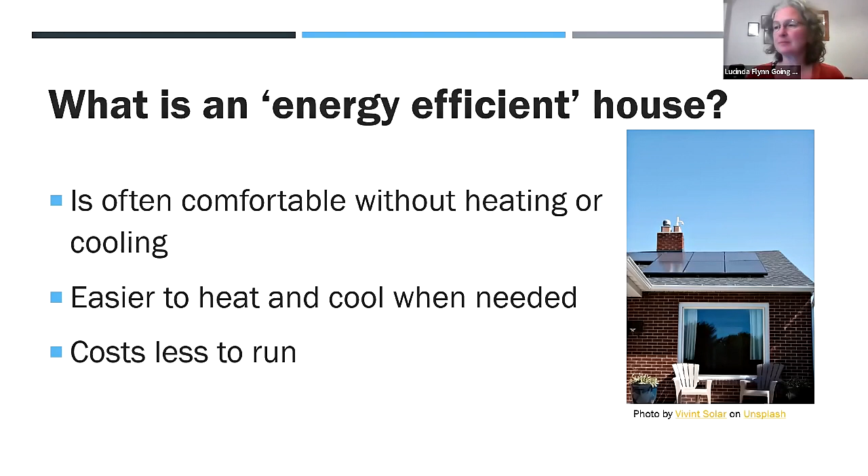What is an energy efficient house? It is one that's pretty comfortable. So at this time of year, you probably won't be coming home and putting on a heater, because it's hopefully going to be keeping you fairly comfortable as is. If you do need to put one on, it doesn't cost you too much, and it maintains its temperature as well. So getting an energy efficiency assessment isn't about me saying, oh, you can't do this, you've got to do this. It's about working out how to make your home work for you as well as it possibly can. And there's lots of reasons why you might want to do that.

The three biggest ones are cost savings, which is very significant. The average home in Victoria costs around $1,800 a year just to run the main fixed appliances. So that's heating, cooling, lighting, hot water, and pools if they have one. And that's just a 3-star rating. If you go below that, it's higher. I think a 1-star rated house is more than $5,000 a year. So as you get a higher rating, your costs go down dramatically. And that's, of course, a massive motivation for a lot of people.

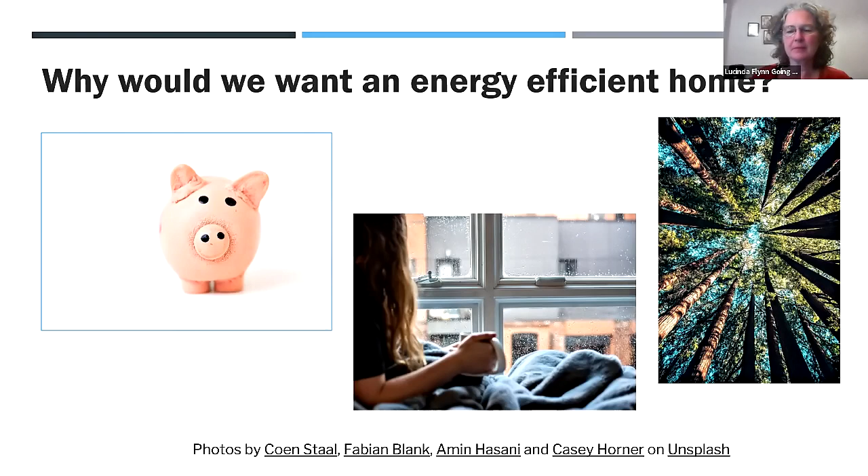Of course, comfort is a huge one. Sometimes people have no issues at all with their bills, but their houses just aren't very comfortable. So that's a really important one. I had an example of a house that I went to and did a scorecard on, and they then did a whole lot of upgrades and got me to come back to do another one to see what the difference was. And he said, we used to have just plug-in electric heaters, and it would cost us $300 a month to run them, and we were still always freezing. And now we've got 2 efficient reverse cycle air conditioners, and it's $120 a month, and we're always warm. So he'd done a combination of appliance upgrades, but also building shell upgrades.

Victorian homes are quite famous, actually, for being inefficient the way they're built. Not just Victorian, probably Australian homes. Sometimes I'll do assessments for people from Europe, and they're a bit stunned by suddenly living in these houses that leak like a sieve, and that you have no other option except to turn the heater on if you get cold.

There are a few reasons for it. One, I think, is just that we are in a fairly mild climate comparatively, and so we've been able to get away with having pretty poor building codes. Even the building codes we have don't seem to be very well policed, so that you might have a plan that says you're going to do certain things, but nobody really comes to check that you have.

There have also been traditionally very cheap fuel sources in Australia, which people have made use of and just fallen back on using devices to change their temperature rather than improve the efficiency of their home. And so all of that has resulted in a society where people have a very low understanding of energy efficiency and how it works. It's not so much that they don't want to do anything about it, they just have no idea how to.

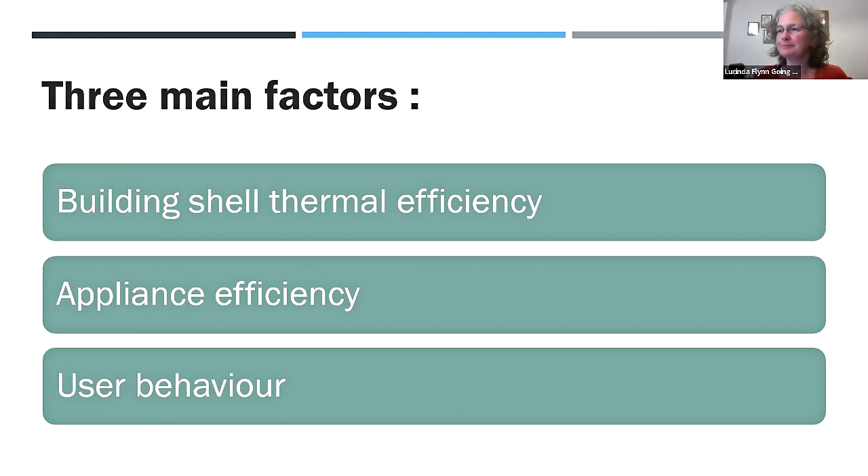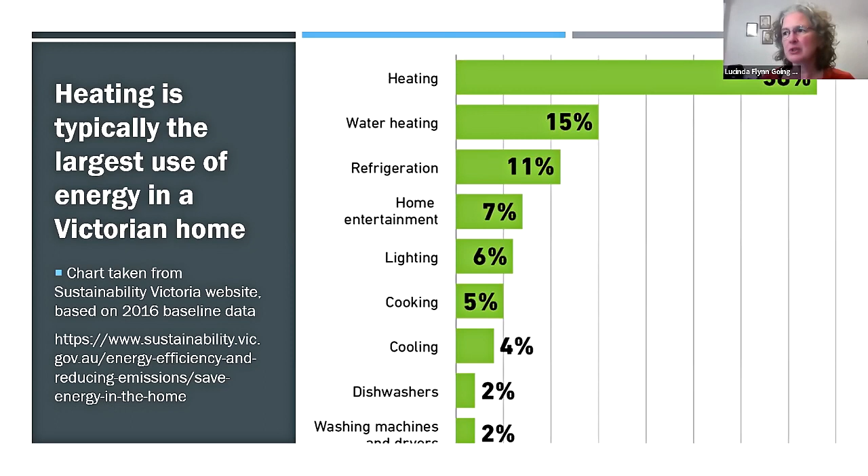So we'll start with building shell thermal efficiency. And this is, as I said, the shell that separates you from the outside environment. The areas that we look at are zoning, drafts, ceiling insulation, window improvements, wall insulation, and underfloor insulation. And generally, I will look at them in that order. And if they're all poor, then I would upgrade them in that order because they're going to give you the most benefit for what you do.

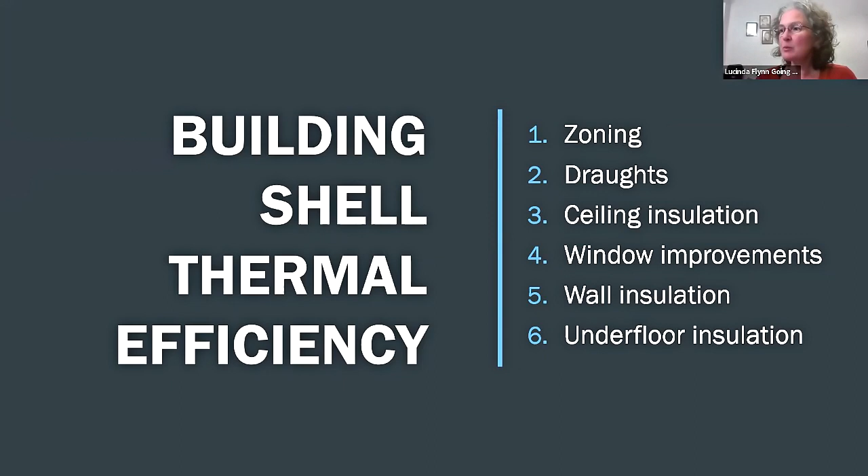But every house, of course, is completely unique, and some will have amazing ceiling insulation and everything else might be poor. So then ceiling insulation gets shunted down to the bottom of the to-do list. That's, I suppose, where an energy efficiency assessor can come in, because they can have that real holistic overview of how all those bits play with each other and fit in together. So we'll talk through these one by one.

Zoning is the first one, and it can actually be an incredibly simple and incredibly effective way to both reduce your energy use and improve your comfort. Zoning as a concept is just about creating smaller areas in your home that you can heat and cool as you need, and also potentially zoning out problematic areas. Say, if you've got a room that is right at the northwest corner, and it's always hot in summer, you could potentially just zone it out to reduce all of that heat coming into the rest of the house. And another common place to zone out would be a drafty bathroom or laundry.

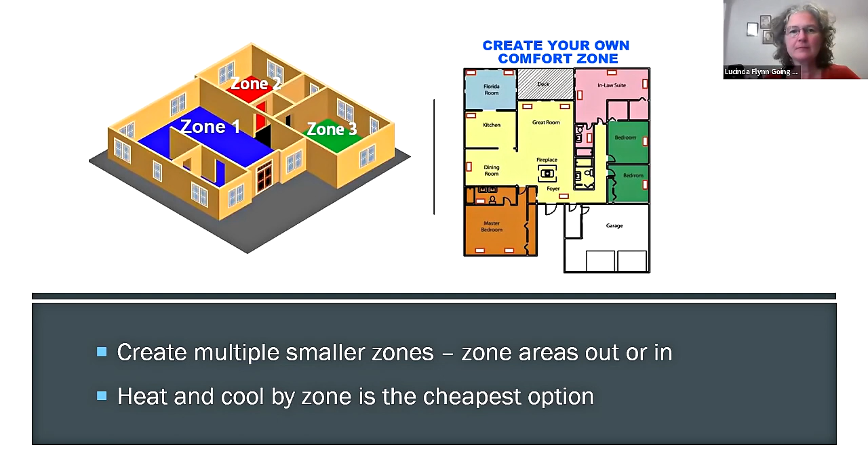Heating and cooling by zone is always cheaper. And so any system that you have, if it can be zoned or if you add individual systems per zone, that's always going to be a lot more efficient. And because the system is only heating a smaller area, it's more efficient at it as well. Adding additional zoning can be challenging depending on the design of the house, and especially the really new open plan houses can be extremely hard. They're not set up for it at all. But older houses are already fairly well zoned.

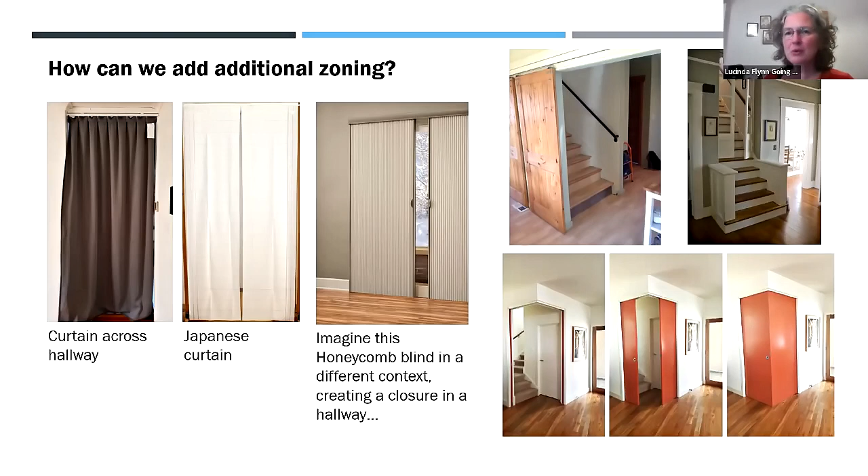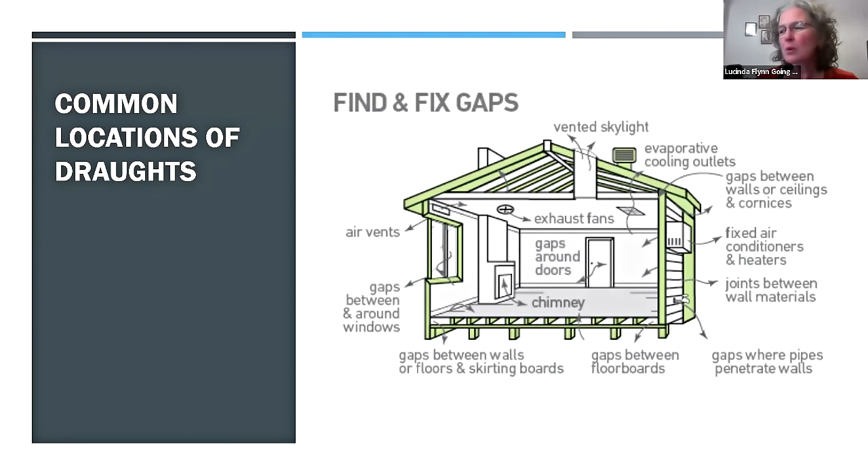Draft proofing is a massive area, and sometimes I think if people just looked at zoning and draft proofing in their homes, I'm convinced that they would often feel the difference straight off. I know in our house we certainly would have. We're in a 70s house which had heaps and heaps of drafts, and just draft sealing is enough to change our comfort levels. So this picture shows all of the kinds of drafts that are commonly found in a house, and we'll be talking through them, not all of them, but the most important ones.

Most of the time when people have open fireplaces, I'm not talking about wood combustion heaters like the sealed ones, I'm talking about an open fireplace. Often when people have them, they'll say, oh yeah, we use it once or twice a year just for a bit of ambience. And the rest of the time, it's just this open hole sucking conditioned air out of the house. So those are the ones that are really important to seal, which you can do. Actually, I'll talk about that in the next slide.

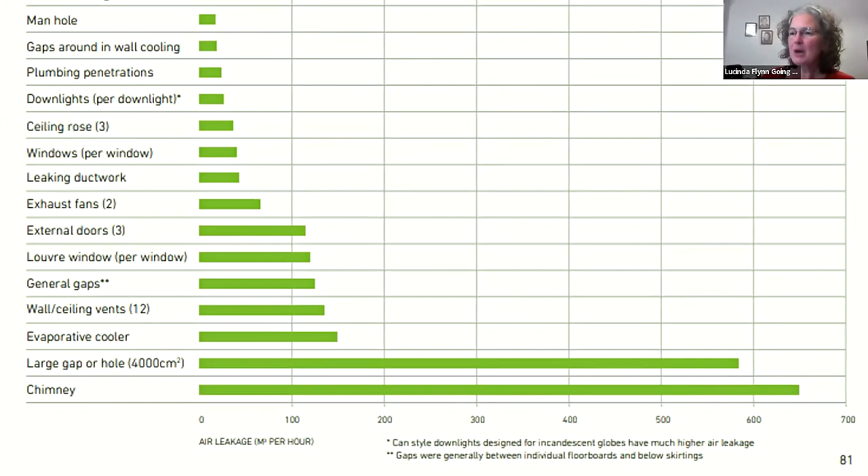The large gap or hole that's the next biggest impact would be from something like an open louver window in a bathroom, the louver windows that don't close at all, they're just permanently open. And then evaporative cooler covers are the next biggest one, which is very surprising for a lot of people because they're extremely common. I'd say probably half the houses that I go to have evaporative cooling, and people generally aren't aware what a drafty system they are. I won't go through the rest, but we will talk about some of them now.

We'll begin with the open chimneys. So to seal them, there are specifically made products that can be put into them. And the top right-hand side 2 pictures are of what's called a Chimney Sheep, which is a piece of felt that's cut to size to fit a chimney and has a pole on it, and you put it up your chimney and it's got a little tag hanging down saying this chimney has been blocked. That's an important factor because you don't want somebody coming to stay for a few days and try and light a fire and smoke out the house.

The bottom right-hand side shows an image of another chimney seal product from a company called EcoMaster. They're a Melbourne-based company, and they have a range of really good draft proofing products of all types. And I highly recommend for all of this draft proofing stuff that you have a look at their website. One of the things that makes them so good is that they have little DIY videos for every single product that shows you step by step how to go about putting them in. So even if you're just researching and you're thinking you might make something yourself instead of buying it, that's fine.

But you can get some really good information there about how they work and how to install things. Another thing that people do with open chimneys, professional draft proofers that I know will just cut a piece of high density polyester insulation and stuff that up there as well. So I've even heard people saying they've stuck cushions up there. So as long as you make a sign that tells you that it's been sealed, that's it.

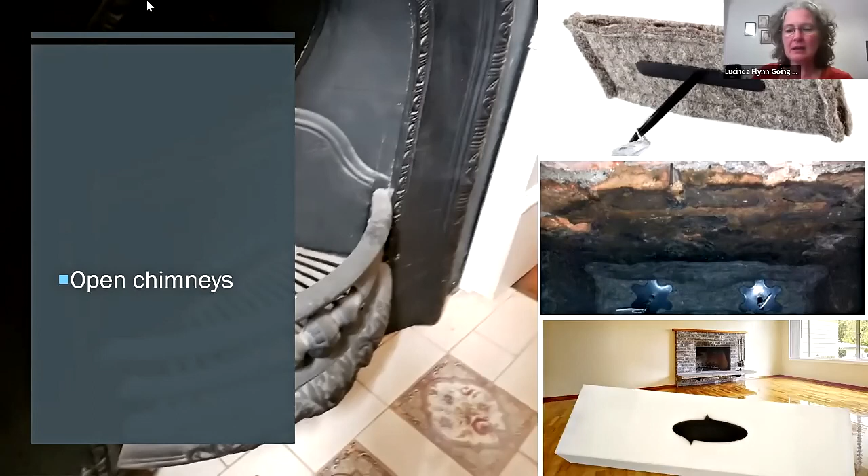Okay, moving on from chimneys. Things that you can seal with weather strips. Actually, there are so many things that you can seal potentially with a weather strip that this is a good one for you to go to the EcoMaster website and do a bit of research on. The typical things that you would seal with weather strips are external doors, windows, and sometimes internal doors.

Most people have experienced the draft proofing strips from a hardware store, the rubber or foam. They're okay, and sometimes they work, but because of the propensity of wooden framed doors and windows to sort of warp and have different widths of gap, sometimes those seals aren't the best option because they either don't fill some of the gap big enough or they're too big for other bits of the gap. And so you end up having trouble closing a door or window. They do compress a bit over time. So there's no problem with giving it a try.

But if you find that it isn't working, EcoMaster has a really great product called EMV Seal, which is, have I got a photo of it? I don't think I do. It's basically a V-shaped piece of either plastic or laminated paper. I'm not sure what it is, but it also has a self-seal strip on one side. And when the door closes, it just can close to whatever gap width it needs to be. So it can handle a few different widths. It also comes in a roll. So that's a great one.

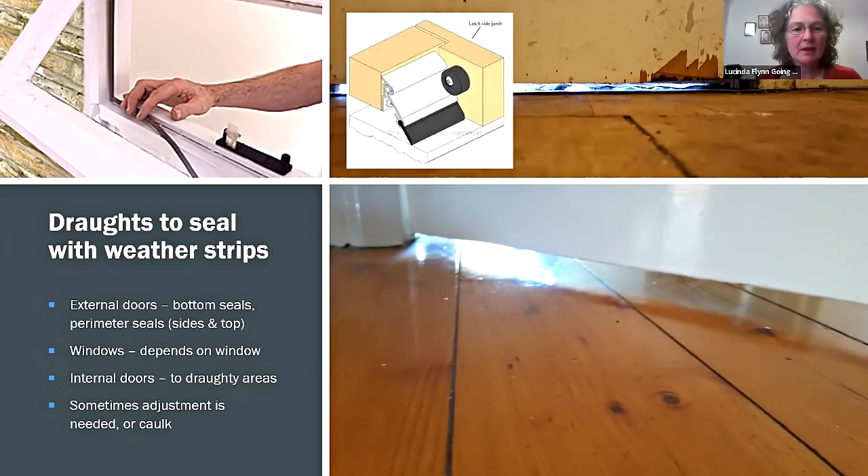Next on the list, oops, I've gone too far, is things that you can seal with a caulking gun. This is a really satisfying job to do, is to walk around an older house and find all the little gaps and cracks and fill them up. Things like wall vents, we don't require them. They predate the sort of 90s. I think it was 1990s that they stopped being installed in houses. And they are from when we used to have kerosene heaters and unflued gas heaters. These days we don't have those generally, and we can seal them. The only time I wouldn't is if you did have an indoor gas space heater.

Other drafts that you can see here, there is the bottom of a door frame, skirting gaps, architrave gaps, and also gaps that tradies have left when they've installed either plumbing or electrical items. Sometimes, if they're not very diligent, they'll leave them behind, in a new reverse cycle air conditioner. There'll be a bit of a hole there, or an oven or a dishwasher. So those things can all be checked as well and potentially filled up.

If it's a bigger gap than usual, you might need a bit of filler rod to stick in there first, which is a little piece of foam that fills in the gap so that when you put the caulking gun along, it actually has something to stick onto and doesn't fall out.

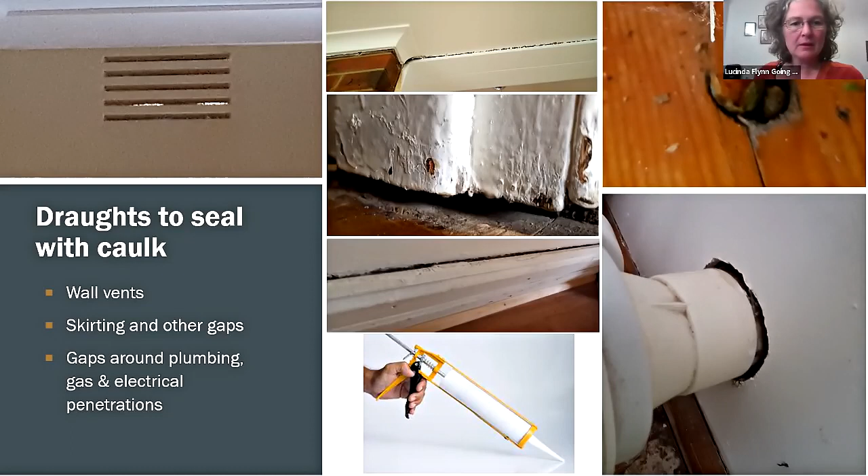Unsealed exhaust fans: the picture in the middle is the heat lamp that I mentioned, and they're not possible to seal, unfortunately. But any of the others, such as the picture on the bottom right, that's just a typical exhaust fan in a bathroom, laundry, or toilet. They are just a hole in the ceiling plaster, and it's straight air movement between that room and the ceiling space. You can't see that it is because it's got the mesh thing at the bottom of it, but if that falls off, you'll be able to see the roof basically, and often you can see light.

Luckily, there's a really simple fix, which is to put a Draft Stoppa over the top, and that's what you see in the top right corner. They're also available free under the Victorian Energy Upgrade Scheme. That's the same scheme that offers light bulb exchanges and home energy monitors. So do look that up and try and get your hands on some.

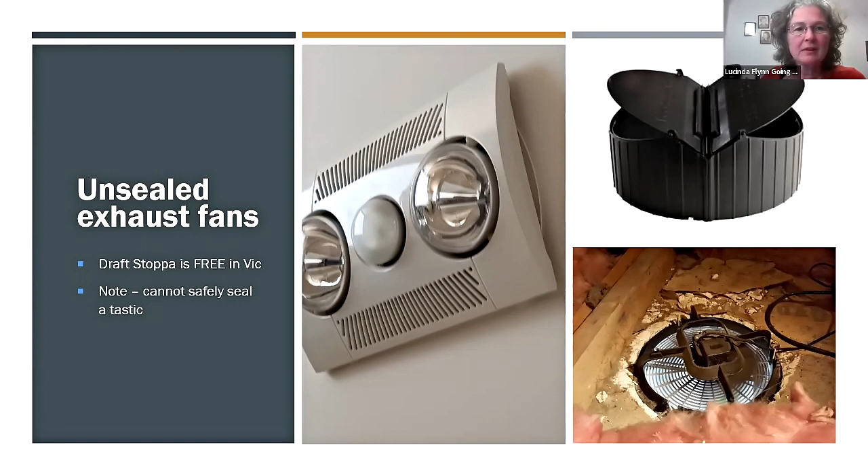Evaporative, open skylights. Those are often very drafty, as are the open louver windows and the other permanently vented windows. What you do with it depends on whether you have an exhaust fan in there or whether the window is openable. You can see with that window with a mesh bit in it, that window is obviously openable, so you don't need that hole there at all. You can seal it up. With the open louver window, I would also cover that up at a pinch. You could do it with bubble wrap, or you could get it replaced properly with an openable window.

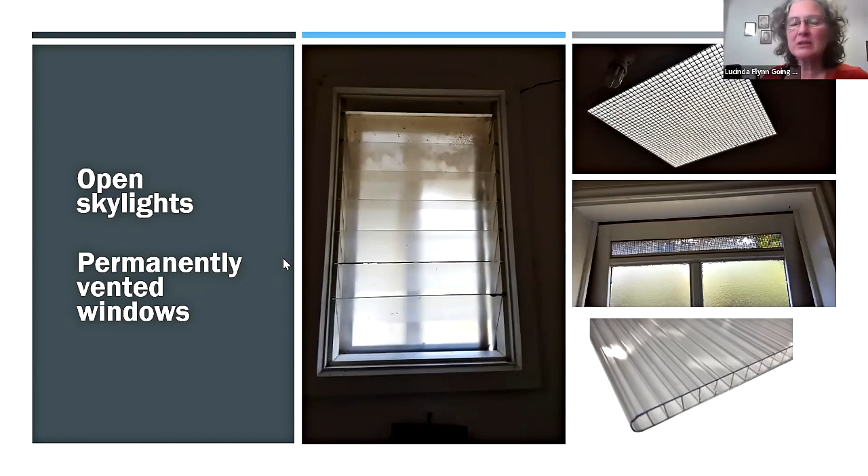And a skylight can be covered at ceiling level with that stuff that's shown in the bottom right-hand corner. It's called Suntuf, and it's just a sort of cellular plastic that you can cut to size and add into that gap. There are other longer-term things you can do as well, but we're just looking at sealing up drafts quickly and easily.

The reason they're so drafty is that, unlike ducted heating systems or reverse cycle air conditioners, those sort of ducted systems are sealed systems, they're enclosed, whereas evaporative cooler systems are completely open on the roof. So there's nothing to stop air going through that unit on the roof and through your ductwork, or vice versa.

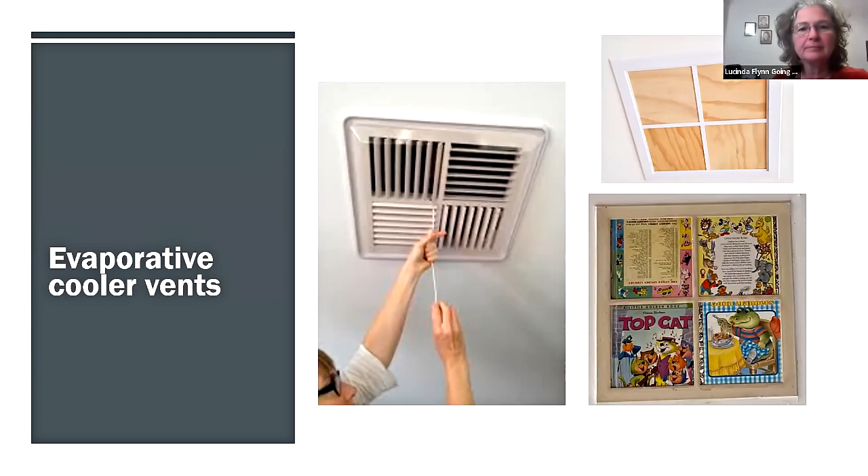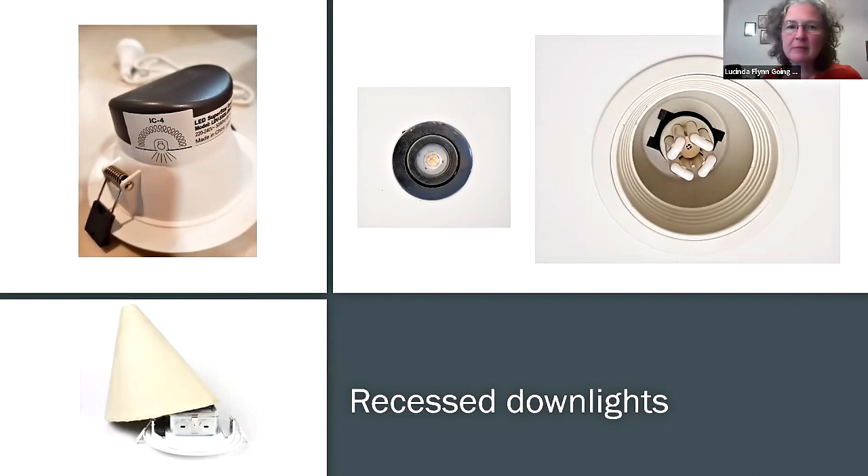So apart from swapping your downlights to the IC4 rated sealed LEDs, another option is that you can put a downlight cover on, which is the picture on the bottom left-hand side. They're easy to get, and if you're getting insulation done in the ceiling, the insulating company can install them for you over each downlight.

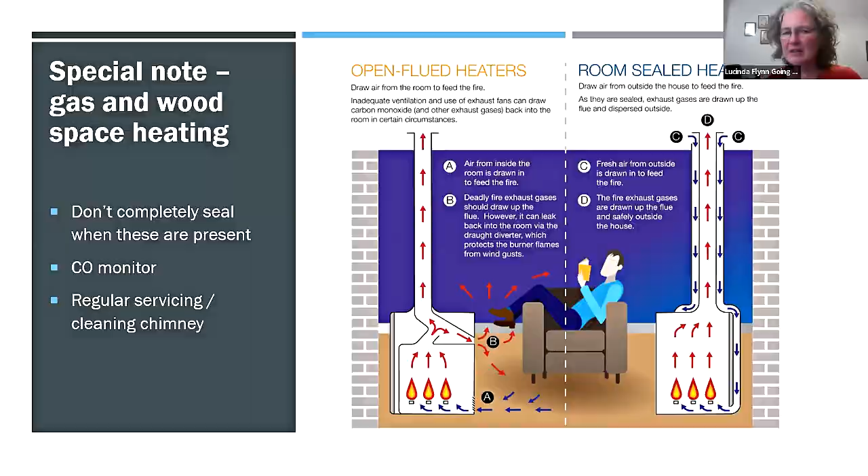A special note, this is really back to draft proofing and potentially hazardous appliances. When somebody has a gas space heater, we generally don't recommend they draft proof in that room. It's not that it will be a problem, but you just never know how well people maintain their appliances and how healthy the air is that's coming out of them. So that's why we don't recommend it. If anyone has something like that, or a wood burning fire, I'd put in a carbon monoxide monitor and just make sure you're checking them and getting them cleaned and serviced.

And that means if you've got a new build house that has R4 or R4.4 insulation, but tradies have come in after it's been built and the insulation installed and moved it all around to put in downlights or ductwork, and they haven't put it back, you might only have insulation that's functioning at half that value.

So people don't look in their ceilings, and I totally understand why, but it is something to be aware of. And if you have tradies coming over, just maybe get them to take a photo before they leave showing that they've replaced it where it should be.

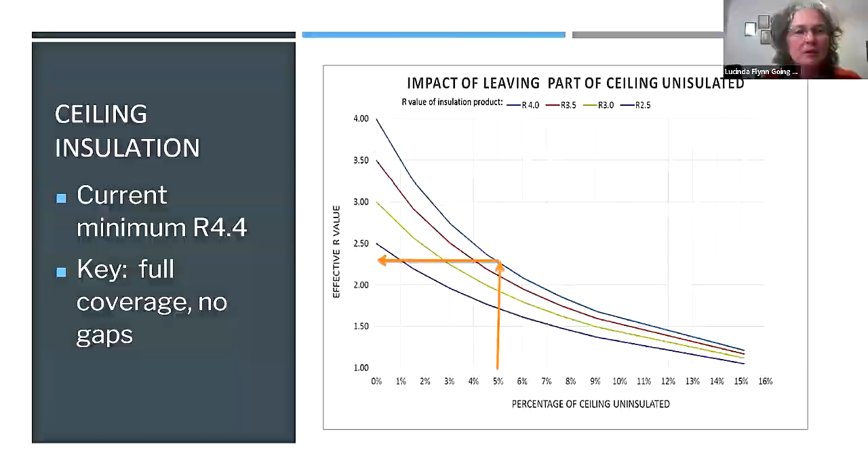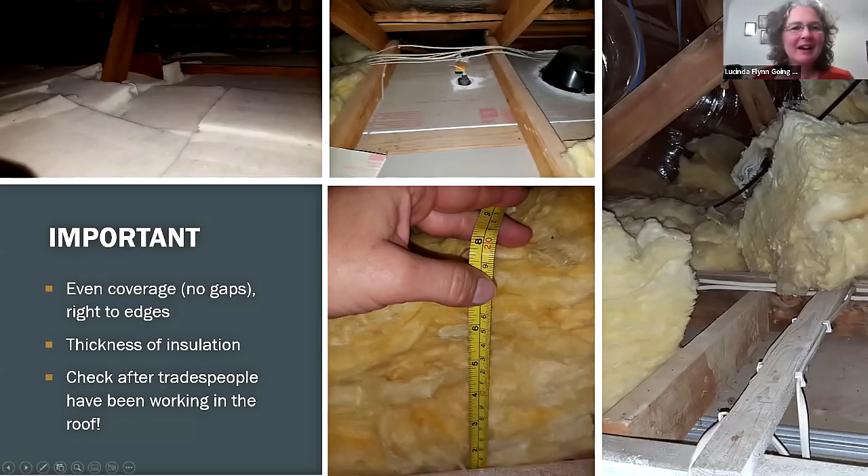All right. Can you do insulation yourself? Yes, you can, but if you've ever tried it before, it's a horrible job and there's lots of hazards. One is dust, simply inhaling it or getting it on your skin, or the fibre of the glass fibre. Electrical safety hazards are a really big one and extremely important to be careful of. I would always turn the mains power off if I was doing any sort of insulation work in the roof or under the floor. Potentially asbestos, depending on the age of your house, and falling either off a ladder or through the roof.

I have young adult children, and one of them did some labouring work and was told that pretty much every labourer that gets in a roof falls through it the first week, because they're just so unused to the fact that it actually doesn't hold their body weight at all. He managed not to though, so that's good.

There was one other thing that I mentioned that I must have taken the slide out for, which is the diminishing value of return of insulation. The biggest return you get is when you go from no insulation or very little, say R1, to R3, something like that. The current minimum is R4.4, but if you already had insulation that's R3 and it's well laid, no gaps, so we're not downgrading the R value, then you get a much smaller return on adding more.

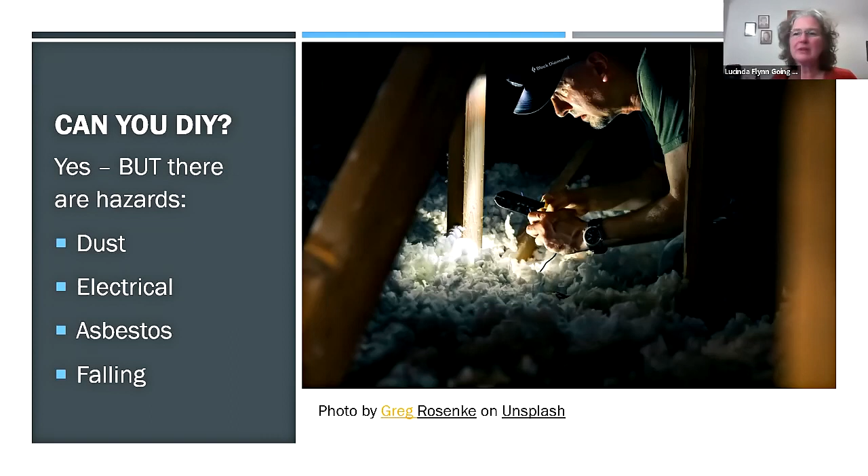So again, if I'm in a house and somebody has reasonable R2 or R3 insulation, that would fall to the bottom of my list because they've already made the biggest impact they can with their ceiling insulation.

Window improvements are one of my favourite topics because there are so many things you can do with windows. Double glazing is heavily marketed, and a lot of the time I go to a house and people say, we know that our windows need improving, but we just can't afford 40 grand to get them all replaced with double glazing. And luckily, I can tell them that there are many other ways to approach it.

So the different things that impact windows are the covering, so curtains or blinds, whatever you have, pelmets, glazing, frames, and external shading. We'll talk through each of them at a time.

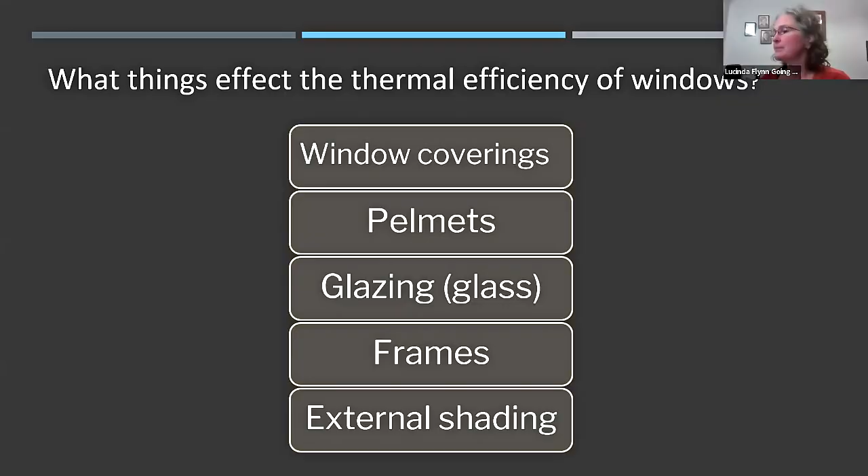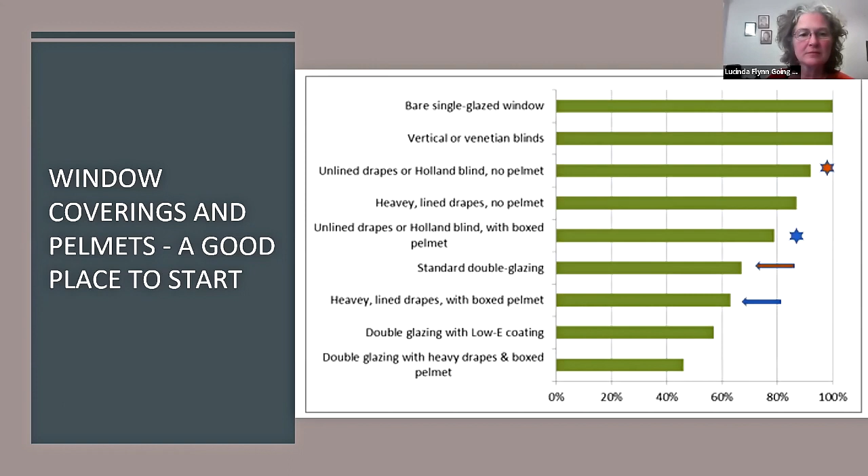Starting with window coverings, as I just said, it's a really good option. It's one of the cheaper options and you can have a massive impact. The key thing to understand about any sort of window covering is that its effectiveness is based on how well it reduces airflow across the glass, because air moving across the glass, either picking up heat or dropping off heat, is how the heat transfers. So the most thermally efficient window coverings are thermally efficient because they've stopped air moving across the glass of your windows.

An invisible pelmet is instead of the box pelmet that a lot of people don't like the look of. It just sits between the glass and the window covering, in the gap between, and stops air either heating up in the summer and moving into the room, or the warm air from inside touching the window and cooling down.

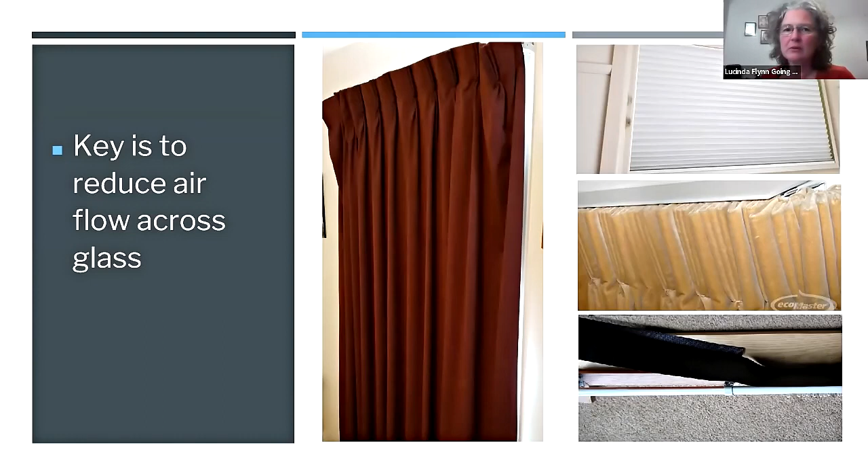Another good option for stopping airflow is the top right-hand side picture. If you have that sort of window style that has deep reveals, then honeycombs installed inside there can be a good option. They have cells that trap air, and as long as they're fitted very neatly, they really do create quite a good barrier to airflow.

Now, with glazing, it boils down to two options. One is double glazing and one is called secondary glazing.

Secondary glazing is where you retain your original window with the frame and glass and everything, and you are just bringing a second pane and adding it on. You can either do it professionally or DIY.

So with double glazing, you've got a few options. The marketed way is to rip out your windows with their frames and bring in new windows and frames that have double glazing. There is another couple of options. So one is that there's a lot of secondhand double glazed windows with frames on the market that have just been over ordered or were ordered the wrong size. And so you can get them sometimes pretty cheap. You just then need to either fit them yourself or get a handy person or a carpenter to do it.

Another option, if you have timber frames, is to keep the frames because they're great. The timber frames are the best, and just replace the glass. That can be a brilliant option for older houses that have timber framed windows, and costs a lot less, so about $275 per square metre for the glass cut to size, not including the installation. Whereas a brand new double glazed window glass and frame is going to be about $1,000 a square metre.

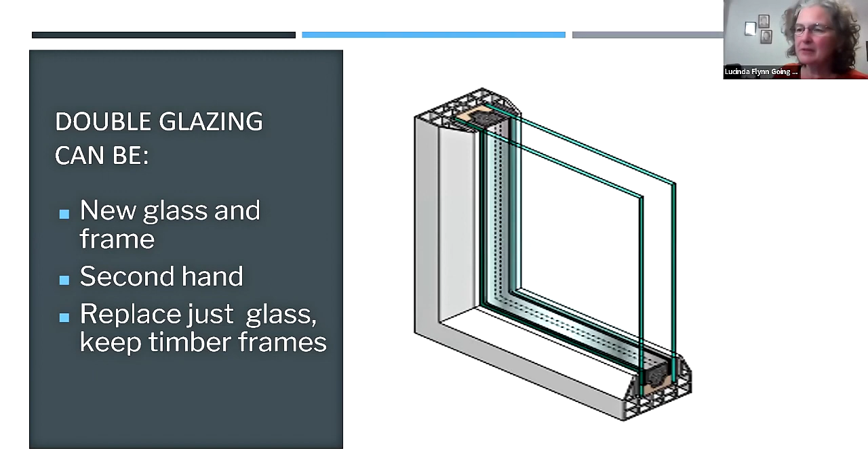Professional secondary glazing is done by a bunch of companies. Some of them will only work with timber framed windows. Some will work with any kind, including old style aluminium and steel framed windows. So check what each one does. It's about half the cost of removing the windows and putting in new frames with double glazing. So it's still expensive, about $450 a square metre, but you end up with an extremely professional look, and everything works. They make sure they don't leave without all the bits of the windows still working properly.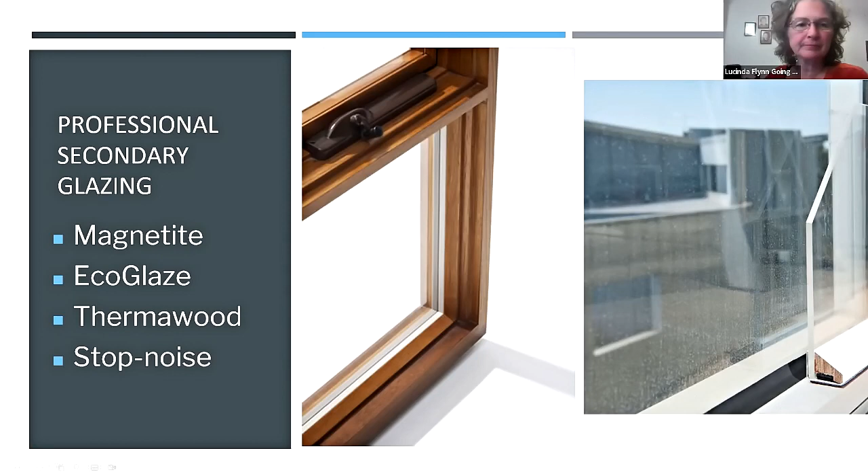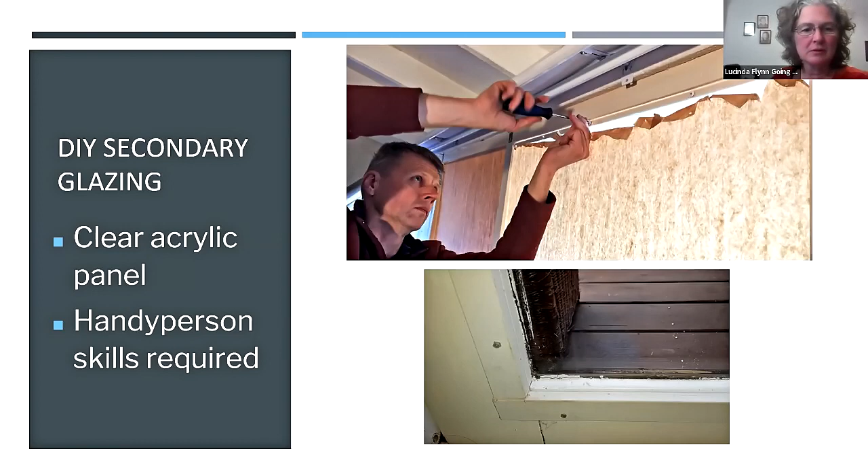Then you've got the really cheap DIY secondary glazing options, the cheapest of which would be using bubble wrap, which I think is becoming a little bit more popular. And it's not pretty, but imagine you're in a share house or in a rental that you can't do anything, or you're just really suffering from a freezing cold house. Bubble wrap is probably going to be a really nice option.

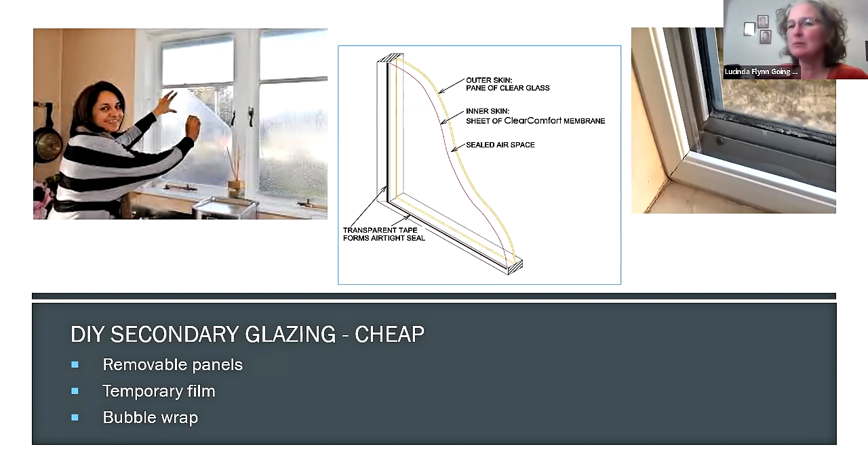And then the middle picture is an example of something called, the one brand is called Clear Comfort. If you want to look that up online, you can see the website and how it works. It's pretty much a clear, thin sheet of plastic. Around your window frame, you put some double-sided tape, stick the plastic on, and then use a hairdryer and shrink it. And again, it creates a still airspace, and it works really well. It's considered temporary because I guess it's very lightweight. If you had cats and they were clawing on it, it would break, but it does work really well in a lot of instances.

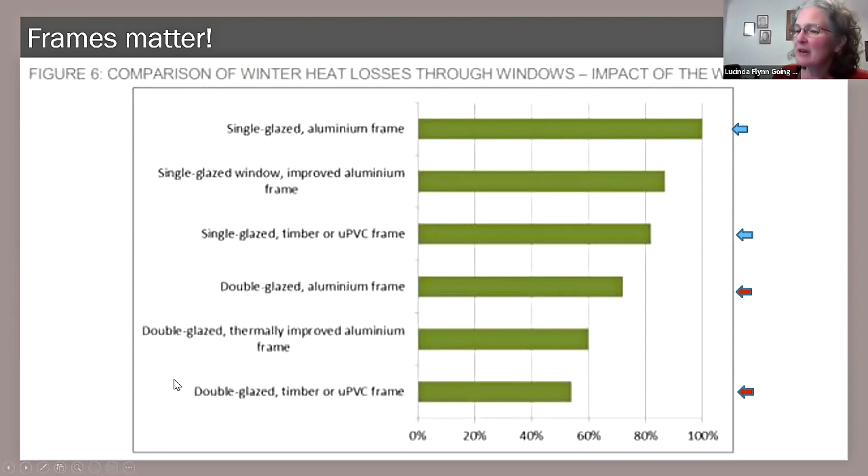Onto frames. Frames do make a really big difference to the thermal efficiency of windows. And that's because things like aluminium and steel, they transfer heat themselves. So even if you have double glazing, but you have one of those as a frame, you're getting a benefit from the double glazing, but then losing out a bit with the metal that's transferring heat really well. Timber or UPVC is going to be the best option. Of course, the worst option is single glazed windows with an aluminium frame, and the best is double glazed with a timber or UPVC frame.

I've talked a little bit about the costs already. So, $800 to $1,000 for the brand new everything. Professional secondary glazing, $450-ish. Just the double glazed glass into existing timber windows, around $275-ish. And then DIY secondary glazing, it depends really on whether you can self-install or not. But if you could, it would be, actually, yeah, $100 to $150 per metre square if you get someone else to install. And then Clear Comfort film is the cheapest by a long shot.

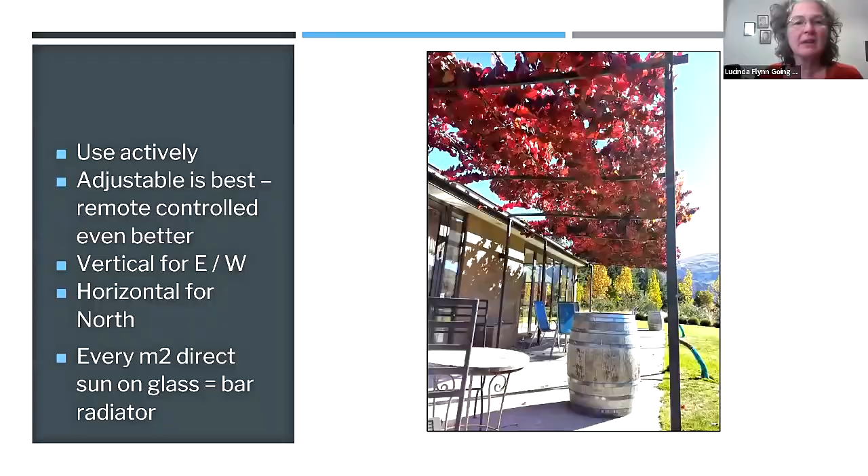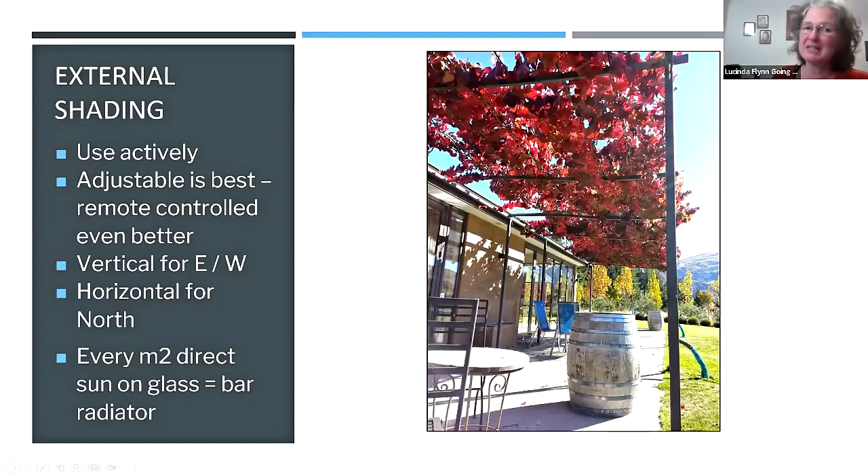All right, shading. In summer, double glazing won't help you at all. It doesn't reduce any impact of direct sunlight coming in through the window. So you really need external shading anywhere where heat gain is an issue with sunlight touching the window. The picture I've got there is probably my favourite version of it, which is a deciduous vine, but it can be any physical block. Generally, for north-facing windows, horizontal is the most effective, but for east-west windows, you really want vertical because that's when the sun is either rising or going down and will be beating at those windows from the side. And when you do have direct sunlight on glass, for every metre square, it's said it's the equivalent of a bar radiator on in that room. So that's how important it is to sort that out.

Wall insulation is these days very easy to install by having it pumped in through your weatherboards or brickwork. Even in a double brick home, it can be done. And that insulation company that I mentioned a little while ago, enviroflex.com.au, they do this pump-in wall insulation. It's quite brilliant. We've had it done at our place, and they came and did it within a few hours. I actually hoped it would be longer so I could watch them, but I missed most of it. And yeah, they go away, all the holes are patched, and there you go. It's like putting a jumper on your house.

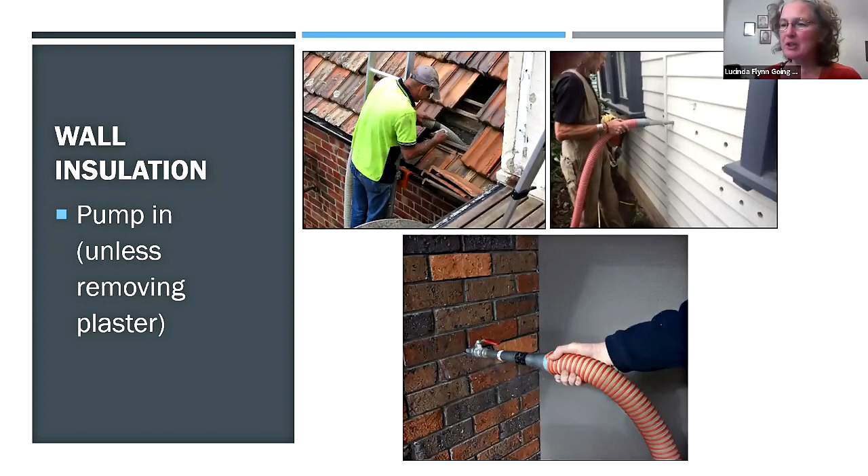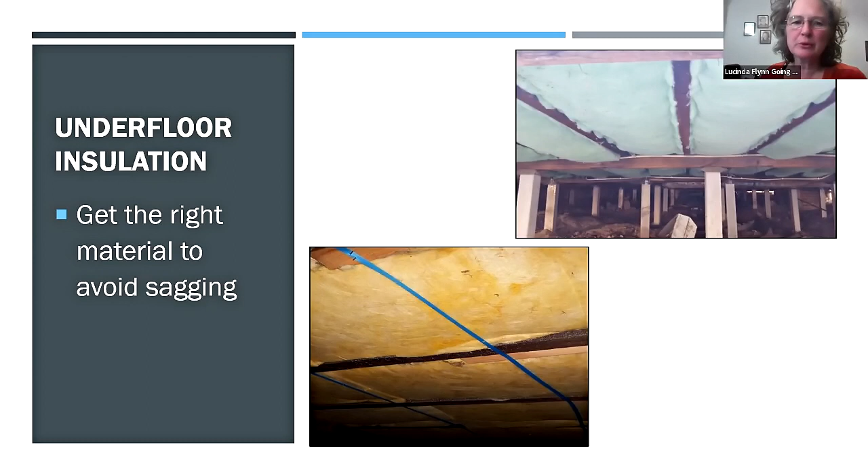Underfloor insulation is also brilliant. The importance of it depends on the style of the house. We're on a hill on stilts with lots of air movement under our house, and we just had floorboards, no other floor coverings at all. So for us, it was shunted quite high up the list because of that huge airflow beneath. But if you have a house that's on a flat surface and maybe it's bricked in at the sides and not much space between the floor and the ground, it's less important. Or if you have carpets or floating floorboards, things like that, that all makes it less important to do underfloor insulation.

And there's a brilliant new Victorian government rebate for low-income households of 90,000 or less for replacing older gas, wood, or plug-in electric heating, or even reverse cycle air conditioners older than 7 years. They will give you $1,000 off the purchase and install of a new reverse cycle air conditioner, and they have some additional amounts they'll give you if you need to cap off a gas heater or update your meter box in order to be able to install that new reverse cycle system. So that's a really good one. I think the link is under there, but feel free to ask me, I can send through the link to that. Or if you look up Vic heater rebate, you should find it as well.

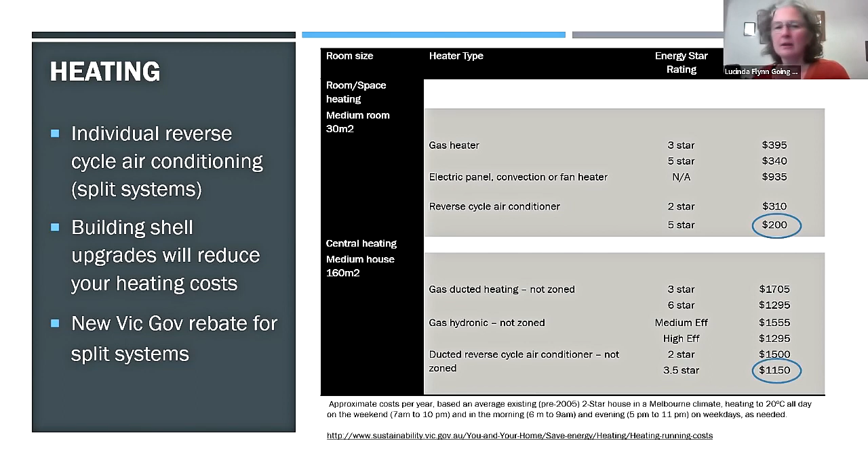Now, things that you can do that don't have anything to do with replacing a heating system are setting the thermostat. When you're driving a car, it has a sort of sweet spot where it drives the most efficiently, and heaters are like that as well. The thermostat in winter, ideally, you'd want to keep it between 18 and 20 and just dress to fit the season. Heating by zone, that we've already discussed. Also, cleaning and servicing appliances.

You just wash it off with some warm soapy water, put it back in, and suddenly you've got an air conditioner again that's pumping out cool air. So I can't promote that enough. Please spread the word that air conditioners have filters.

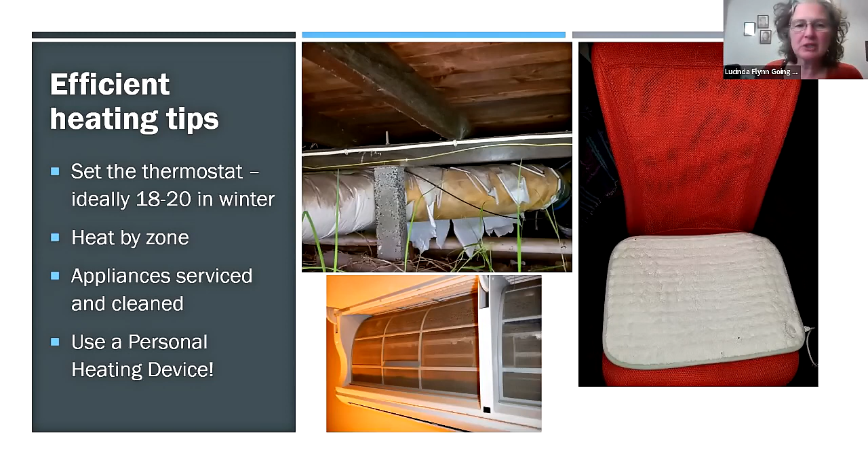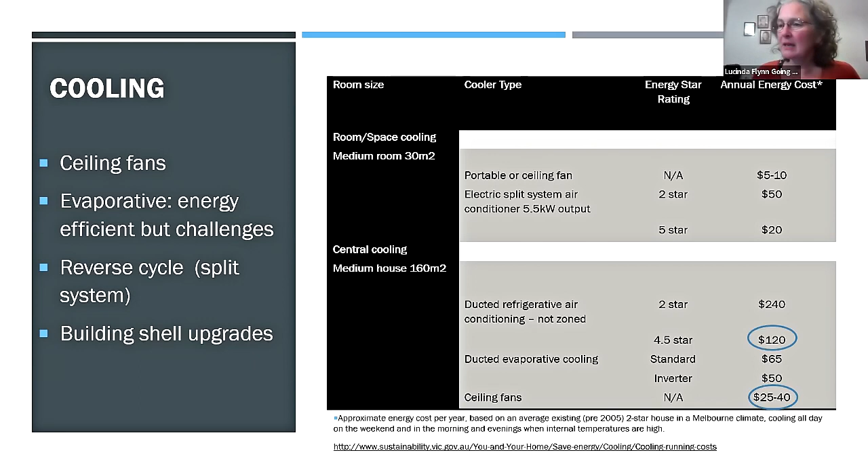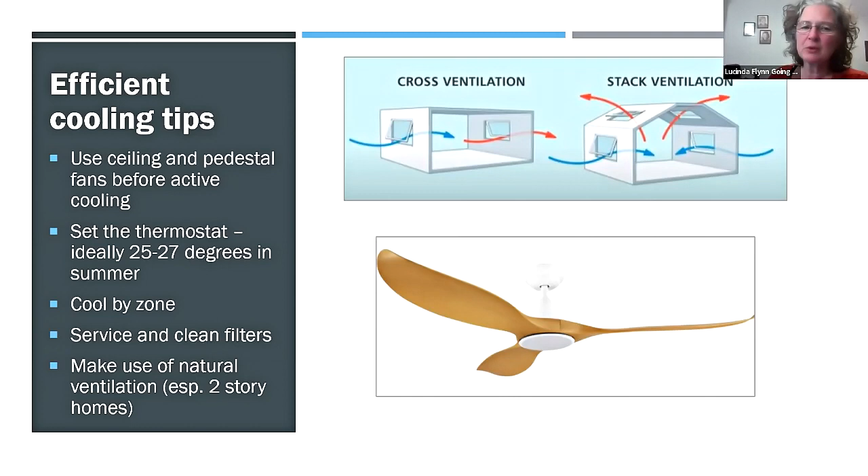Again, building shell upgrades are going to reduce your need for cooling. Cooling tips: fans of any kind, setting the thermostat, but this time setting it a bit higher and dressing for the season, cooling by zone, cleaning and servicing machines, and using ventilation whenever you can, especially after a hot day, to get hot air out of the house.

And the other thing is that if you have a heat pump instead of solar hot water, you can leave all your roof space for solar panels and then time the heat pump, if it has a booster, to boost when your solar panels are generating their electricity.

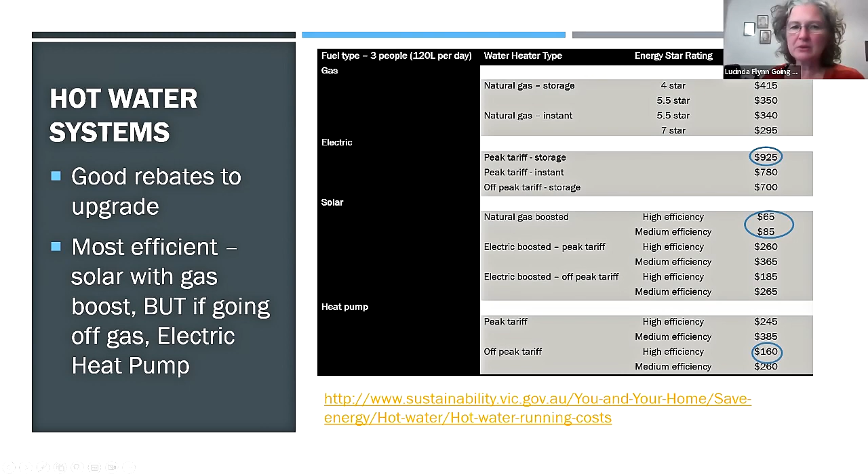How to make hot water most efficient is, well, shower heads are a massive one. Sometimes that can make hundreds of dollars of difference, going from a 20 litre a minute shower head to an 8 litre a minute one. So go for the WELS 3-star shower heads. They are also available free under the Victorian Energy Upgrade Scheme, so you can organise one of those to come and be installed for you.

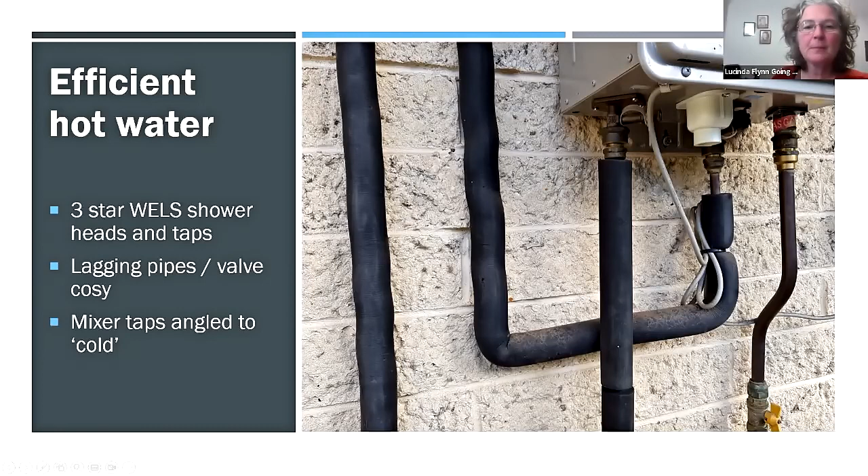Other appliances, generally we don't look at them as scorecard assessors, but they can be big costs depending on the appliance. And really the key is generally how old they are. Things like fridges are often the next biggest cost after the main ones that we look at. And older fridges can be very expensive to run, like cost $1,000 a year to have your 20, 30-year-old fridge that's in the garage for the beer. The newer the fridge, the better. Basically anything that's less than 7 years old is super efficient.

And there's a wonderful energy rating calculator that you can look up. If you're in the market for a fridge, the key with a star rating is you first work out what you need, what size you need. So do you need a 600-litre fridge? And then you compare the star ratings of different options. And each star rating that you get higher will be less running costs for you for the next 10 years or so.

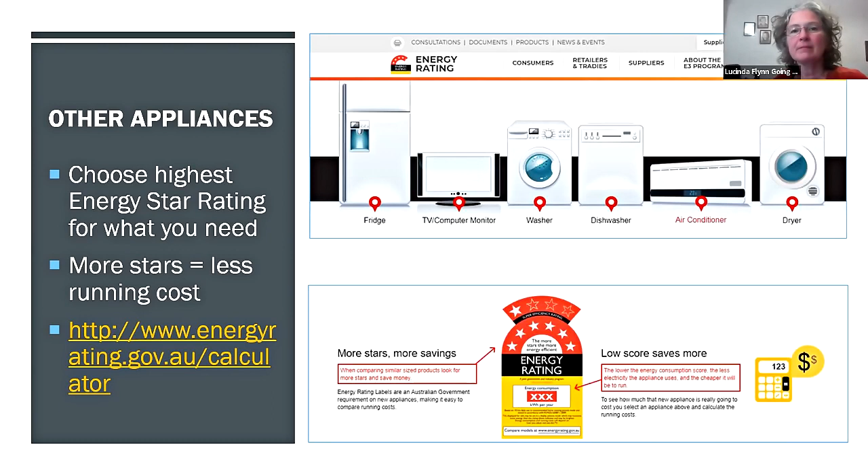Solar, I'm realizing you're doing an entire solar, or already have done an entire solar presentation. So I might just skip through this, is that right? Tim, can you tell me you've already covered solar completely? In a detailed sense, yes. This is kind of a summary in a way. And yeah, okay, I'll just talk through it again. We went through some pretty complicated scenarios and setups. Yeah, out at the solar expert who lives out in the bush. Yeah, Glenn Morris, that was. Yes. I think it's worth doing again, Lucinda.

Okay, great. So solar electricity, these days the prices have come down so much that it's worthwhile for almost anybody. The only reason it wouldn't be is if you had massive shading on your roof, or if you're only going to live there another year and then leave. The payback is between 3 and 5 years, typically, not always. But if you get an approved solar retailer to have a look, that's the highest level of reputable solar retailers you can get. They can give you an extremely accurate payback figure based on your current bills.

Any north, east or west roof space is usually okay for solar as well. It used to be that we'd only do north, but now all of them are fine. The current Solar VIC rebate is $1,400, and there's also a $1,400 interest-free loan you can apply for to help cover any out-of-pocket costs. To get the VIC government rebate, you have to use an approved supplier anyway. Even if you aren't eligible for that rebate, I always would. To find out more about that scheme, you can go to the Clean Energy Council website and look up approved solar retailer, and it'll explain all about it and how to find one.

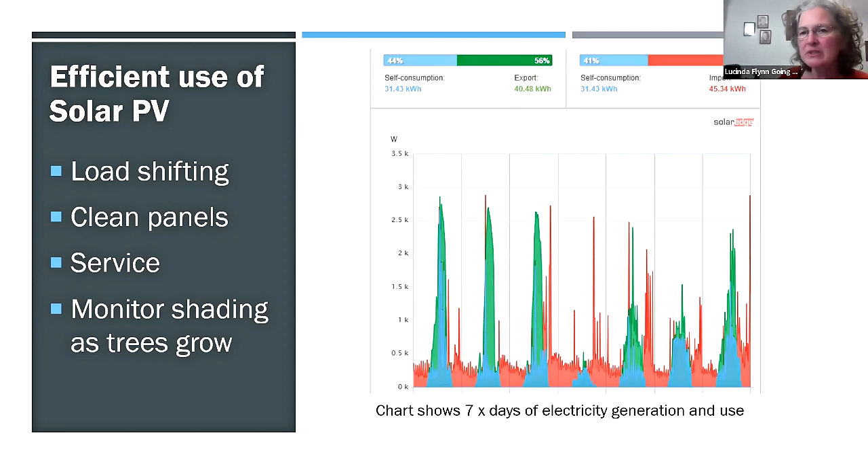There's lots of help available to us, luckily, to help work out how we're using energy and what we can do about it. Actually, I think I've got these all in separate slides. So there's tracking our own energy use, comparing our energy rates, looking into all the rebates and incentives that are available. There's lots, especially for us in Victoria, and potentially getting a home energy efficiency assessment.

So with tracking your own energy use, the first thing you need to know is who your distributor is. So not the company you buy the electricity from, but the one that sends you the notices saying the electricity is being turned off on such and such a day. They're the distributor. They pretty much all have a free portal that you can log into with information from your bill, and they'll give you very detailed data about what your energy use is.

And you can also compare it from day to day, week to week, month to month, to see common factors. Like, for example, if you have an electric hot water system, you'll see a massive boost in electricity use, probably from about midnight till 2 a.m. every day. And that's one way that I can work out if somebody has that sort of system remotely, if I can get a look at one of these charts. So I think everybody should sign up to this. It's a great way of understanding what's going on in your house.

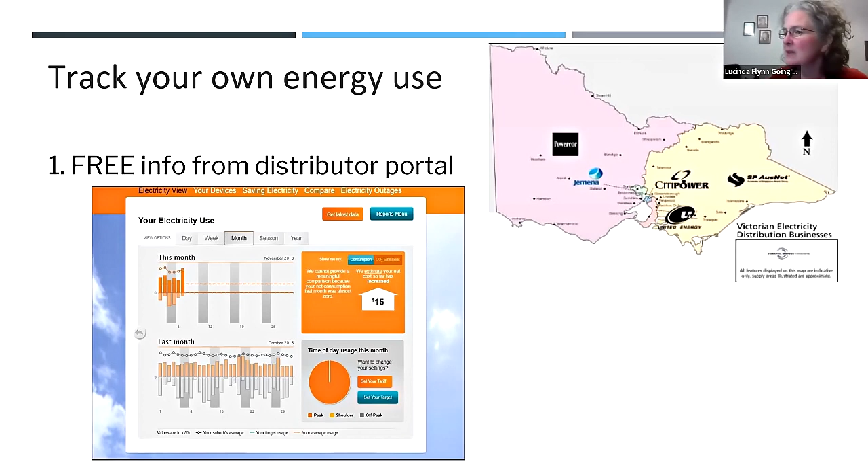Then there's the free home energy monitor, which is basically the same thing. It's free under the Victorian Energy Upgrade Scheme. There's PowerPal and other brands. It doesn't really matter, from what I know, which one you get, but an electrician comes and installs it on your meter box, and you can track your energy use again, but this time using a smartphone app.

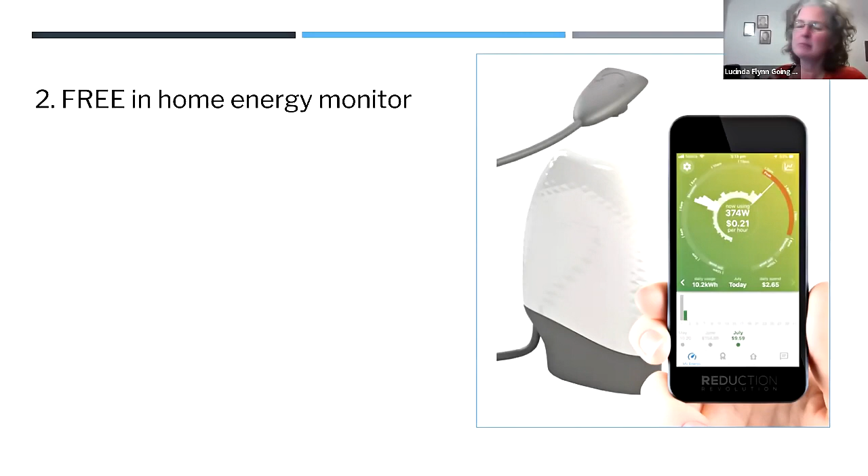I think that everyone should compare their electricity and gas rates every year. When you join a company, they'll always give you a nice sweet deal, and then within a year they've added on costs and it's risen. So it's just worth checking regularly to see that you're getting a good deal. If you haven't, claim the $250 Power Saving Bonus. I'm guessing probably people on this will have. A lot of people have these days, but it's open to every Victorian household, so spread the word about that as well.

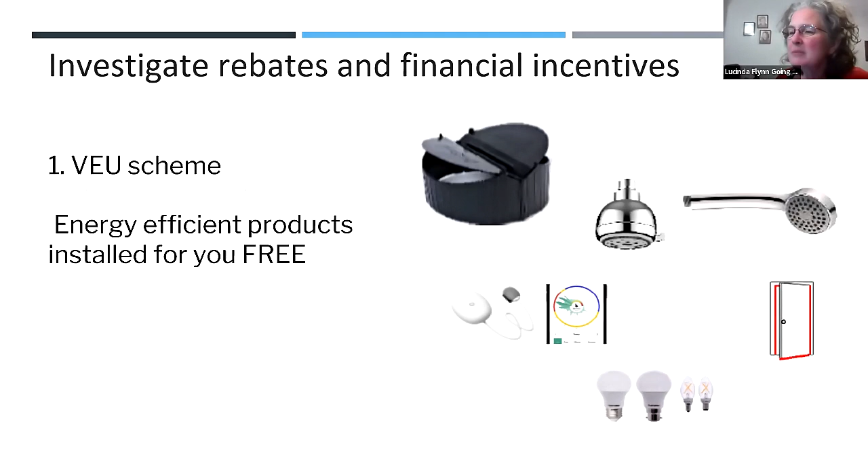There are plenty of rebates and financial incentives. Like I said, we're very lucky being in Victoria because we have more than any other state. We've got the Victorian Energy Upgrade Scheme that offers all those things in the pictures on the right, plus more. And this is where you apply for them and someone comes and installs them in your home for you. So you don't need to do it yourself.

Then there are two types of certificates you can claim for larger installations, so things like hot water systems, reverse cycle air conditioners and solar systems. One is the Victorian Energy Efficiency Certificate, VEEC, and the other is the STC, a federal one, Small-scale Technology Certificates. Depending on what you're installing, you may be eligible for both. So if you're getting a quote, make sure you've found out if it's eligible and if the person giving you a quote is able to offer them to you. Not everybody is. So I personally think it's easier to go with someone who can offer that. You could be missing out on quite a few hundred dollars if they're not able to.

Then there's bank and home loan incentives. There haven't been for a while, but just recently some have been coming on board, and Bank Australia is one of them that has a range of different incentives for clean energy home loans. Some of them use Scorecard as an indicator. So for example, one of them is if you manage to increase your Scorecard rating by 1 star, then you're eligible for their lower home loan rate.

And then, of course, yes. Yes. There's a request that we have a 5-minute break. It's actually 10 minutes past 8. So it'd be worthwhile thinking about that fairly soon. Yes, I've got 2 slides to go, and then we'll be finished this presentation. Is that okay? Yeah. And then we'll have a break. Yep.

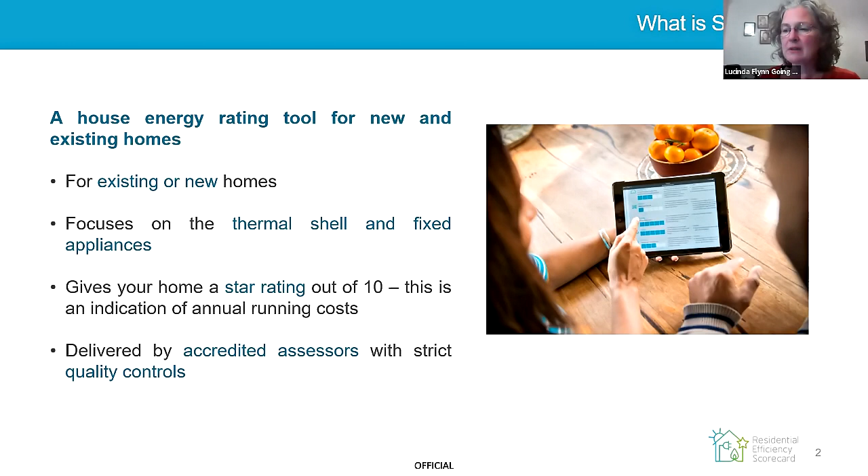It's delivered by accredited assessors and there are quite strict quality controls. The Victorian government did that very much on purpose because there have been a couple of attempts at home energy rating systems that haven't been very stringently monitored, which resulted in a system that wasn't that great. And I'm thinking of the Green Loan Scheme, if anyone remembers that. So this one has been very careful about making sure there are very strict controls on the people that conduct them. The reason it was developed was because, as we know, Australian homes often perform really poorly, they're uncomfortable, our bills are high and getting higher, and we have a lot of carbon emissions because of all those things.

The main thing that I hear as feedback from people, as I've mentioned before, is that they can list a whole lot of potential solutions to things that are going on, but they don't understand how they all work together and they don't know how to proceed. So often they don't do anything because they're waiting to know what the starting point is. The other thing is that research shows clearly that people need to feel that it's a trusted system, so that if they get told certain things, it is actually reliable and trustworthy. And so the scorecard was developed to basically give people the advice they need and trusted recommendations.

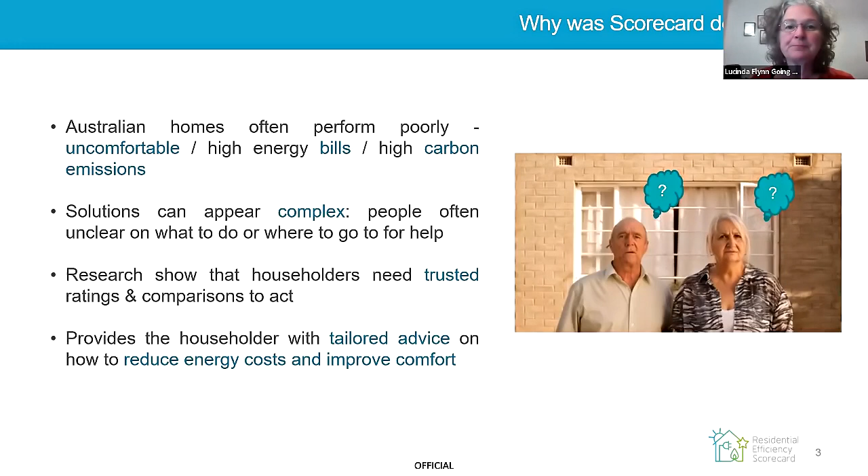There are many ways a scorecard can help. I think from my experience, the most common one is probably comfort and/or high energy bills. So someone might have really high energy bills, but their comfort's okay, and they want to know how to reduce their energy bills. Or they might say, no, the bills are fine, but it's just freezing in winter and we need to fix something. So those are the ones I see all the time.

Also, people renovating: if they're really clever, they will get something like a scorecard done, because by the time you've already done the renovation and potentially made more mistakes, it's even harder to try and fix them up. So before you go and do a big renovation is a brilliant time to learn how to avoid the pitfalls that you might get into.

The other reasons are still developing because Scorecard is reasonably new. If you're renting or selling a home, then technically you could get a scorecard to really portray the features and benefits of your home if it's got a high energy efficiency. Or if you're buying or renting, say you're looking to buy a 3-bedroom home in a certain area, you could compare different homes and different star ratings.

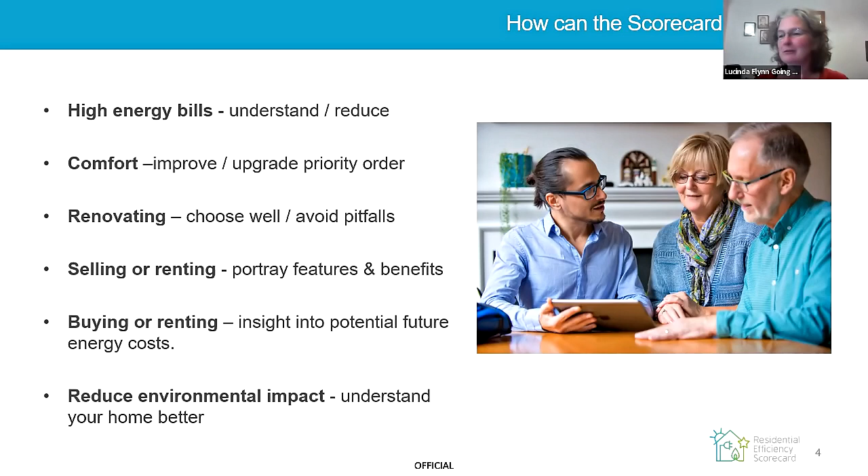And sometimes people will say, my bills are fine and it's comfortable, but I just want to do everything I possibly can to be better for the environment. So that's why I want to do it. And that's very refreshing, to be honest. Usually it's a bit of a combination of all of those things.

There's very consistently high feedback on scorecard assessments. They're doing constant surveys to see what people thought of them, and generally people are very happy. And I think that comes back to having stringent quality controls on the people that do them.

An assessment works in a bit of a flow. The first thing is you just ring up, find out what it is and make a booking for somebody to come and see you. The assessor would then come to your home. Usually it's between an hour and a half and 3 hours, sometimes 3.5 hours, depending on how big the home is, how complicated it is, and also how curious the householder is about their options. Some want to talk through everything and have a list of 20 questions before you get there, and others would rather wait for the report. So then that conversation is going to be shorter.

When the assessor visits the home, they first of all will just find out about the home, the people that live there, how it works, what sort of things they use appliance-wise. Then they will do a walk around the house and collect information about the house construction, the drafts, windows, walls, insulation, and all of the main fixed appliances. And they put it into the scorecard tool, which lets them get a draft report.

Then they sit down together again with the householder to talk through the draft report from top to bottom, explain the rating, and explain all of the recommendations that come with the report. The assessor should be good enough and experienced enough that they can do that on the spot and at least give general ideas of what can be done. After the assessor goes home, they double check all their data entry and make sure they have their evidence uploaded. Then they would write a report, which has a lot more detailed information, and send it all on to the householder within a week.

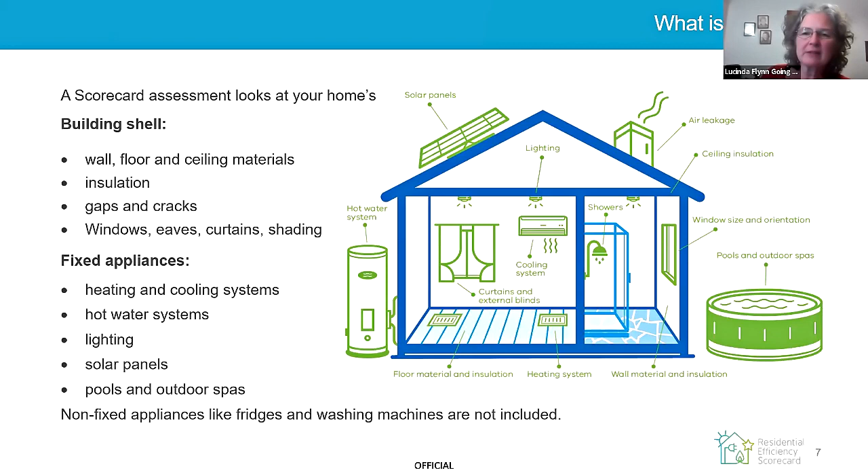These are the types of things that are looked at. I've already covered these, so I might just skip over that one. But the one thing is that we don't record things like fridges and washing machines, because this scorecard is about the house itself, not the people living there. And we assume that they're going to be taking all that with them. So it's only the things that are fixed into the house.

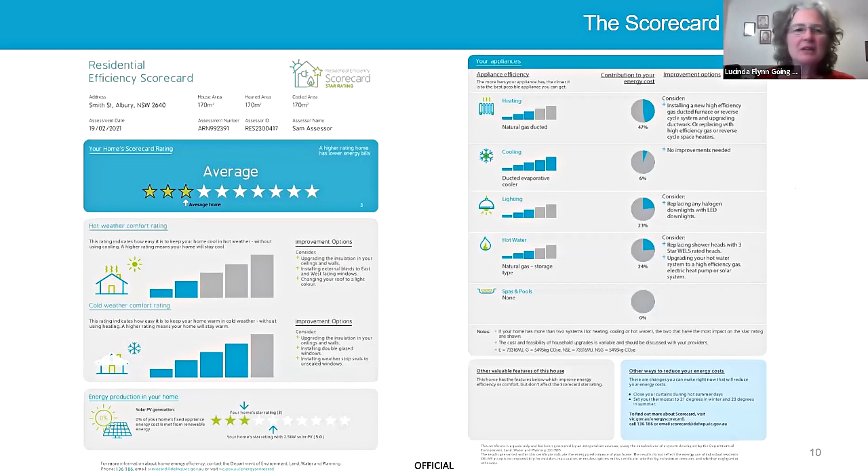I'm going to talk through the scorecard certificate bit by bit. It's a 2-page certificate, and that's the front and the back page. The top part is the actual star rating, and that's the running cost rating for a house. And I mentioned that the average 3-star house costs roughly $1,800 a year just to run the main fixed appliances. So not anything else that you've brought into the house, but just the main fixed ones.

A 1-star house can be more than $5,000. A 6-star house is around $800. An 8-star house is about $250 only for the main fixed appliances. And then a 10-star house, you can only get above 8, so you can only get 9 or 10 if you have a solar PV system on the roof generating energy.

9 stars represents that you're generating roughly the equivalent dollar value of energy than you are spending on energy. And 10 stars means that you're generating more than the equivalent dollar value. So technically you should have net negative costs.

The second part of the scorecard is the section that's most like the NatHERS rating, because it's looking at how comfortable the house is likely to be in hot or cold weather if there was no heating or cooling on. So imagine that you got total blackout and you're completely relying on the building itself. How comfortable is it likely to be?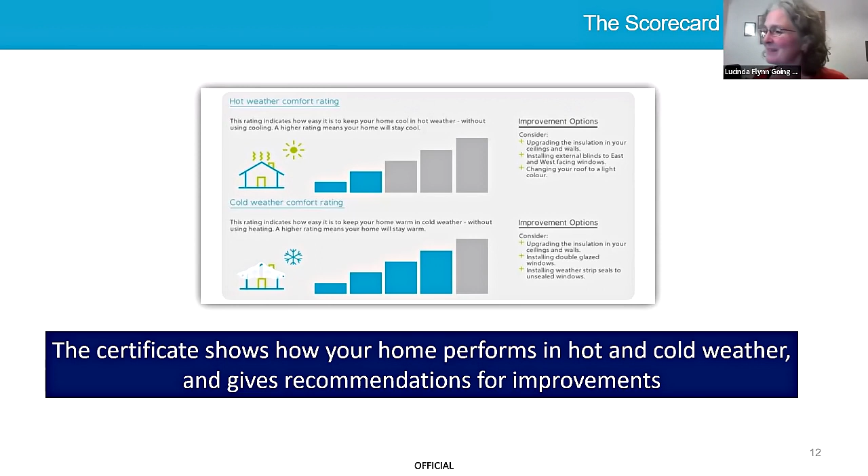The bottom of the first page is the rating with and without solar PV. So if you already have a solar system, this section will show you the overall rating and what it would be without the solar system. The reason that's important is because sometimes if you've got a really big solar system, the generation of energy from that is making it look like your home is really energy efficient.

Whereas say if your rating with a solar system is 8 stars, and if you take it off, it's 4, then you've actually got between 4 stars and 8 stars that you could improve the building shell and the main fixed appliances, because that's as high as you can get without solar. That's why that comparison is put on there, to allow you to see what part of your energy efficiency you could still improve without falling back on solar.

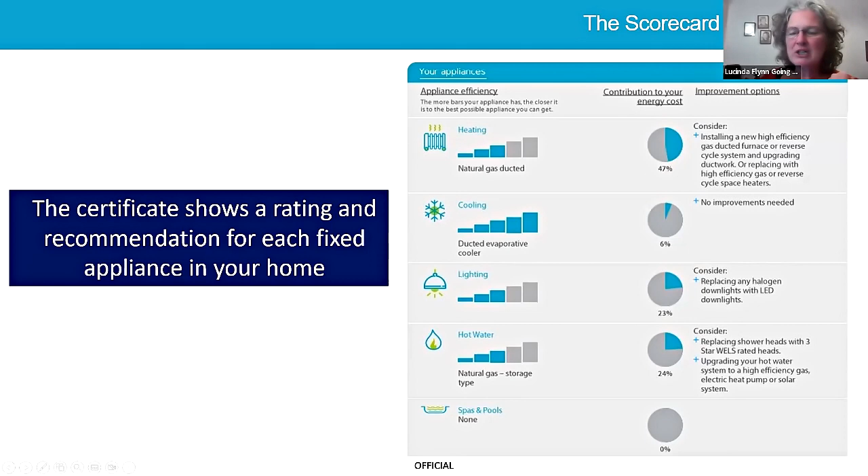You can read them together as well, that if something is extremely inefficient, like an old box air conditioner that's only 1 bar out of 5, but it only uses 2% of your energy, it's also not going to be the first priority to change, because it's not a big enough portion of your energy to worry about as much.

All assessors go through very rigorous training and a process to become accredited. First of all, you have to apply to be entered into the system. There's a range of ways you can do that, which is a couple of slides away, I think. Then you do training in how the scorecard tool works, which is quite complicated. It's something that I feel like you just keep learning about the more you delve into it.

But Scorecard is a very technical tool, and it does all sorts of calculations behind the scenes. So part of it is helping you understand, if you've done a draft certificate for someone, why is it giving them this many stars? Why is it recommending the things that it has? There are reasons for all of that, and you need to be able to explain them to the householder properly.

You have to pass a written examination, an oral examination, where you do a role play as if you were in a house and you were advising someone on the results of their scorecard. Also, all assessors are audited regularly. So what that means is that the auditors will get sent a set of 3 scorecards that someone has done, and they audit them and double check that all of the evidence uploaded and the notes and everything matches and looks correct. And if there are too many things wrong, then they go back to the assessor and say, hang on a sec, you've got to lift your game here, because this is not correct.

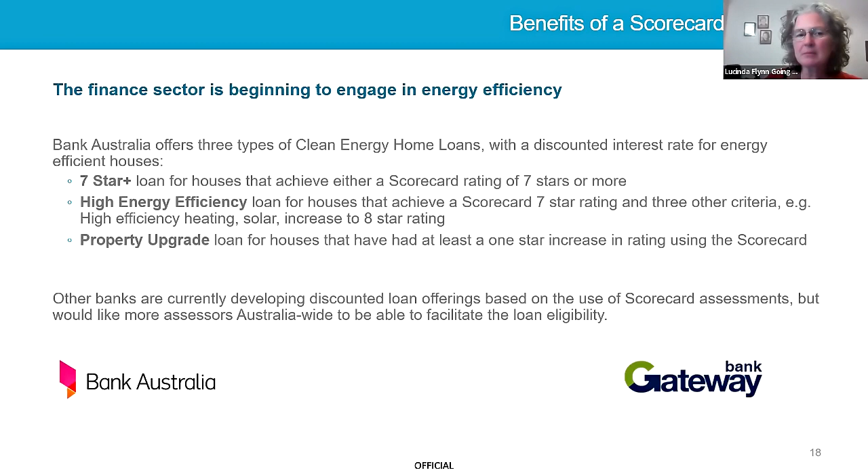The finance sector, I mentioned in the last thing, is really beginning to engage in energy efficiency, with all the loans that are available, and more are coming on board all the time. Also, the Scorecard team is trying to make partnerships with banks and other companies to give more benefits for Scorecard. There are local governments using it. There are several councils around Melbourne that have been organising free or subsidised home energy assessments for people in their council areas, and financial incentives to go along with them. So Banyule Council's been doing it, Moonee Valley City Council and others. And other states are starting to do the same thing now, which is brilliant.

Remember, it's an industry that has never really existed before. So if somebody's been interested in it for the last 20 years, they've probably got every experience they could need, but there was no formal training for them to have done. And they can still apply as well. So these are those ways. If you are completely new to the industry, then there are 4 accredited specified units that you have to do. You can do them online, and there's a few different RTOs that offer them.